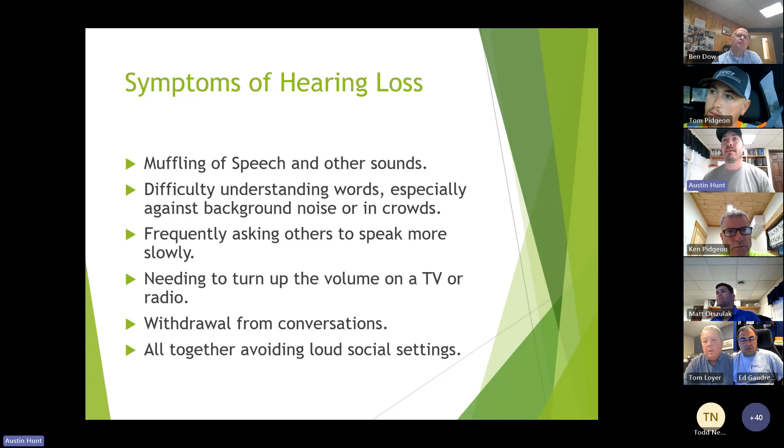So I'm a good example of this. I have some hearing loss in my right ear, and I notice, like in packed restaurants or in crowds and things like that, where I just can't focus on who's talking to me unless they're talking right to my face. So those are things to look out for.

So the permissible noise exposure is 85 decibels for 8 hours. And then as you can see, every 3 decibels it cuts that time in half. So when it goes up to 88, 4 hours. 100 decibels, only 15 minutes. So it goes up exponentially as things get just a bit louder.

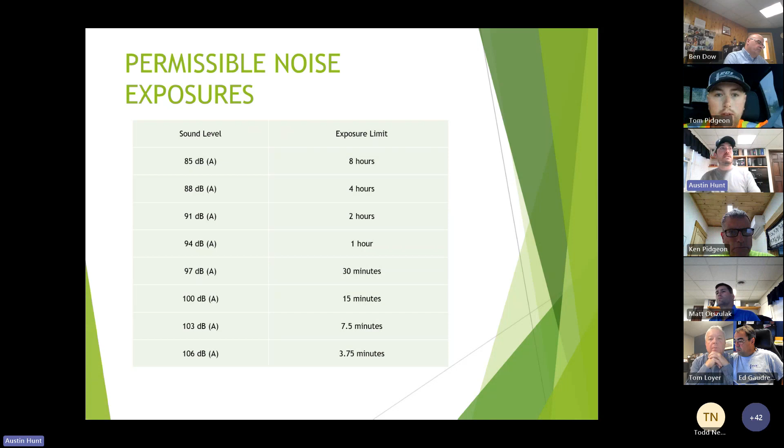You can get an easy little noise monitor app on your phone that will tell you the decibel rating. It's not super precise, but it's good enough to give you a small idea. And we can also come down, we have a decibel monitor. We can monitor what the noise is on the site for over a couple hours or something like that.

So prevention: eliminate or reduce the noise level. Try to surround the source with something that'll muffle the noise. Distance yourself, put some distance between yourself and the noise. If you got a generator running all day, put it behind a job trailer or something like that. Don't have it right in your line of sight where you can hear it all day long.

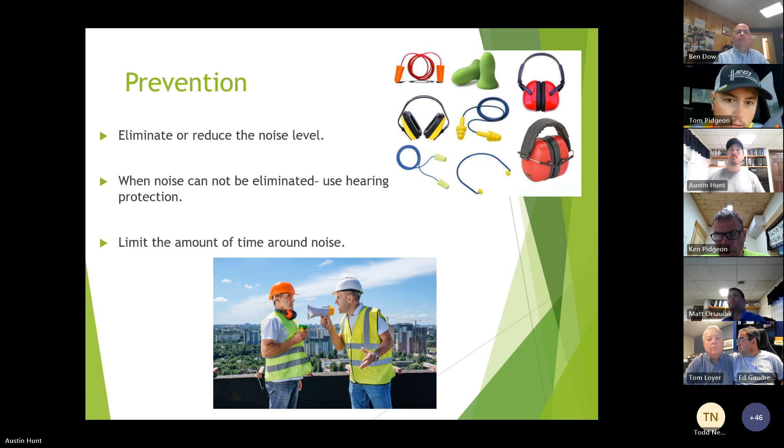For announcements, continuing with this one, there are new vehicle and equipment fuel cards, check with Sarah to exchange them with your old cards. The current ones expire in September, so don't get stuck without a fuel card. The healthcare premium holiday for 2023 is continuing, and we are getting close to the end, so enjoy it.

The next thing I have here is that ECI received a safety recognition at the National Contractors Insurance Conference in August, just last week, at our meeting in Prague, the Czech Republic. And we get a certificate and are recognized by our group.

Since 2019, ECI has been a member of NCI, a contractor type captive insurance company for workers' comp, auto, and general liability. Captives are a co-op type of business insurance, where each member is a shareholder of the insurance company. The top focus of NCI, a 260-member organization, is employee safety. Other local Vermont companies in NCI include FR Lafayette, Omega Electric, and Vermont Mechanical. So we got some pretty good representation from Vermont companies in our group.

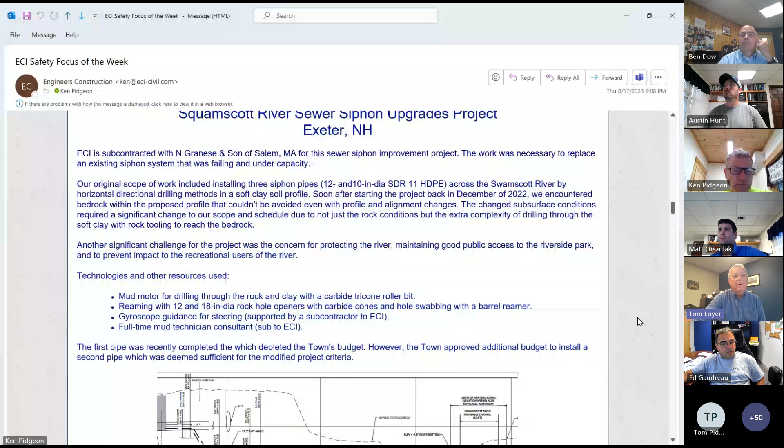This was our first time using a gyroscope. We had a full-time mud technician consultant on-site at the request of the project owner, and he really did a nice job — I think our folks learned even more about mud, so that proved to be positive.

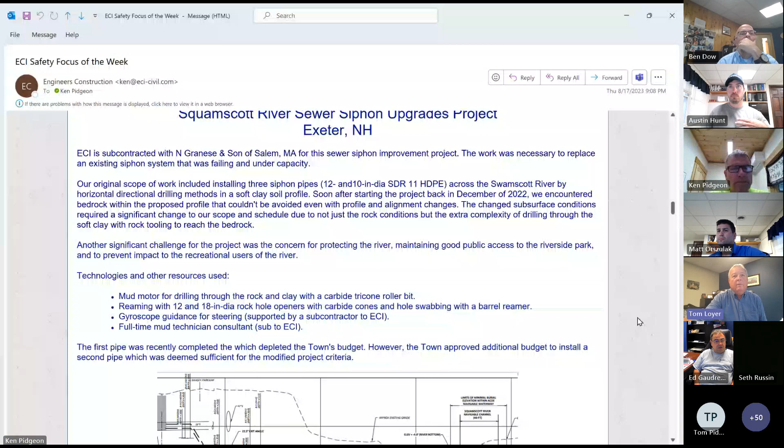The first pipe was completed Tuesday of this week, which depleted the town's budget. The town also, on Tuesday, approved at a special town vote additional budget to install a second pipe, which was deemed sufficient for the modified project criteria — that's barely going to get them by. Initially it was going to be 3 pipes, but switching to two 12-inch pipes is going to get them over the hump and within their budget. So we'll be back in December, after December 1st thereabouts, to begin the next pipe.

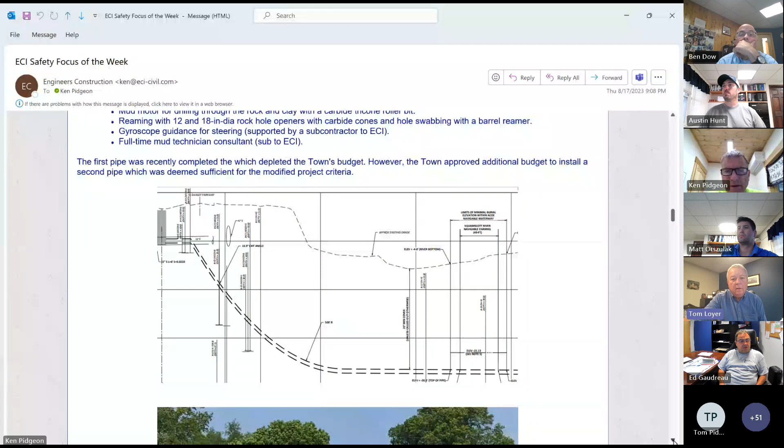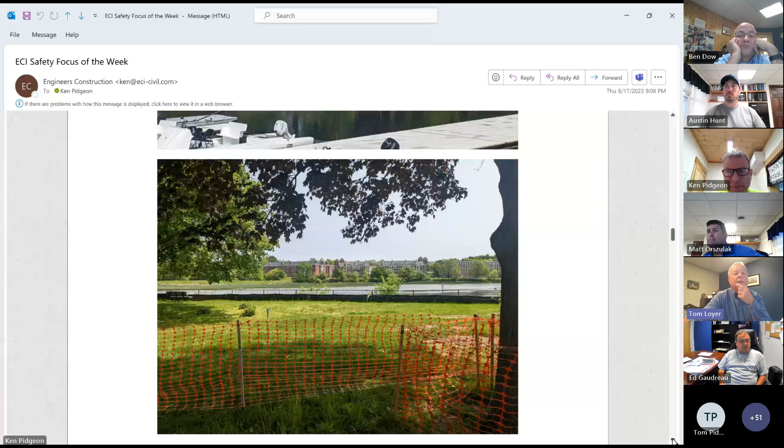We refer to this project as the Swasey side and the mill side. The Swasey side is where the sewer treatment plant was, and that's where we had our reclaimer set up and did our pilot drill across. The next picture shows the mill side, where we ended up. This shot was a little under 900 feet, but looking across it sure looks further. This is the area we drilled to and ultimately pulled from.

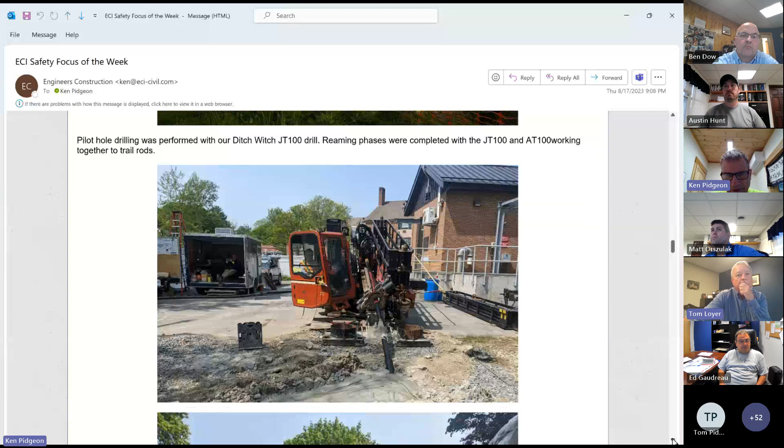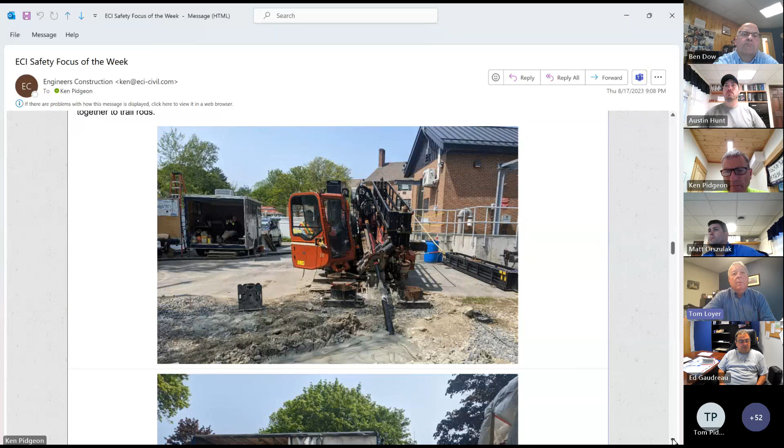We used our JT100 drill for the pilot hole, then used both the JT100 and AT100 working together, trailing rods when we increased the hole size. We were backed right up to the wastewater plant and there was absolutely no room to work. One consideration early on was bringing in the bigger blue drill to help, but the site wouldn't take it. So it's tight, but this shows the sewer treatment plant and our locating trailer.

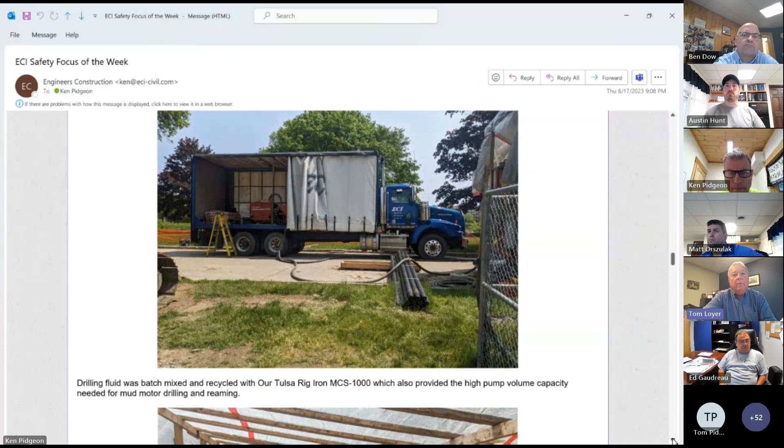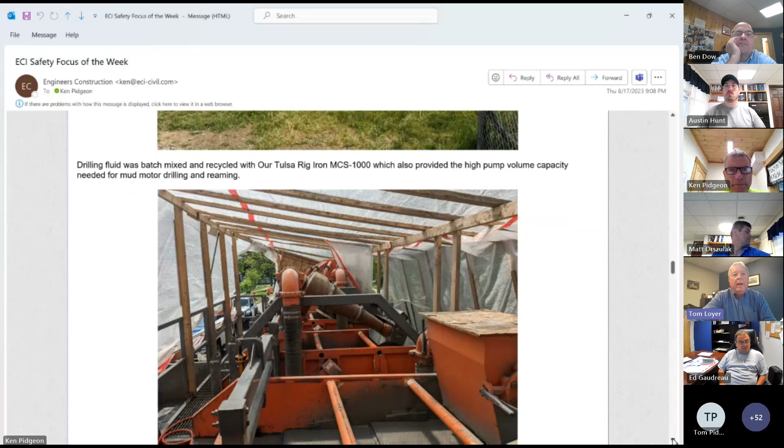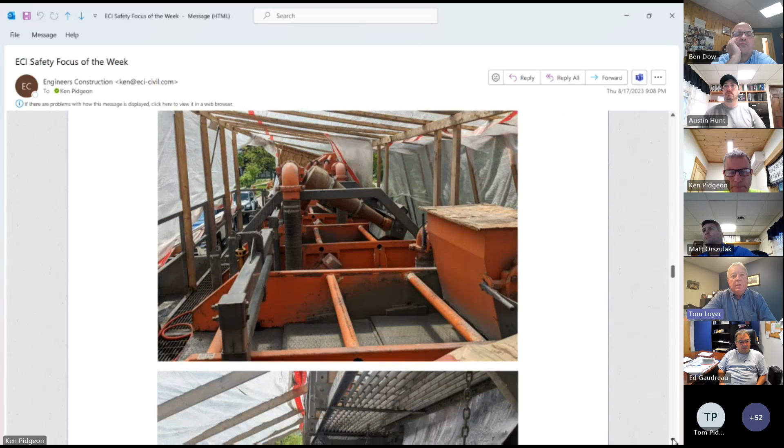There's our mud truck, mixing mud. That machine got a lot of work this time around. Drilling fluid was batched, mixed, and recycled through our Tulsa rig, which also provided high pump capacity for the mud motor, which uses a lot. Here's the reclaimer with the shakers, and the next picture shows the solids coming out - they get less solid as you go. It goes through 3 series of shakers to get rid of all the solids, and then we recycle the mud and continue.

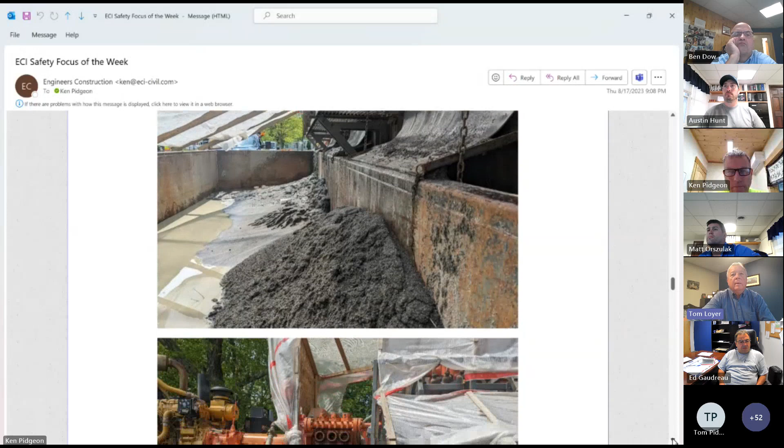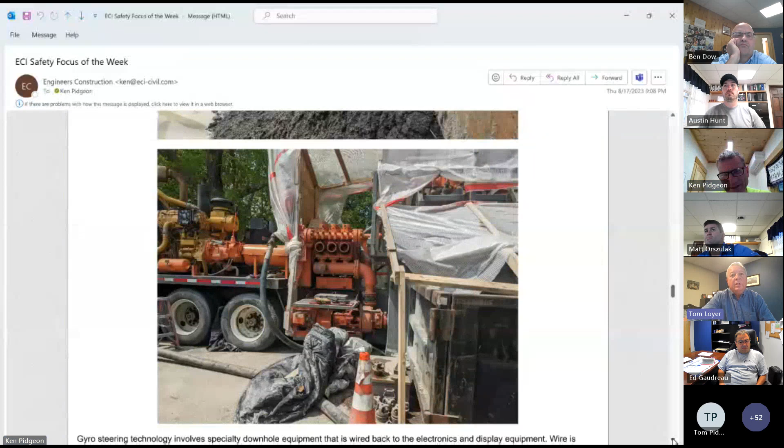There's the pump and the power station. There's 2 very large diesel engines - you can't see both of them. There's one Cat on this face, and another one on the other side. It's a massive machine for sure, definitely heavy, and it pulls hard.

We used gyro technology for steering, as I mentioned earlier. This involves specialty downhole equipment that is wired back to the electronics and display equipment. Wire is added and spliced to each drill rod as the borehole is advanced. The data is used to verify line and grade and provides a digital as-built record.

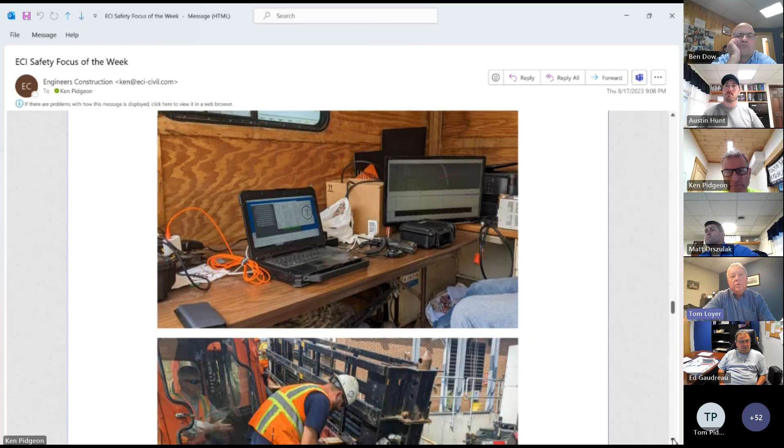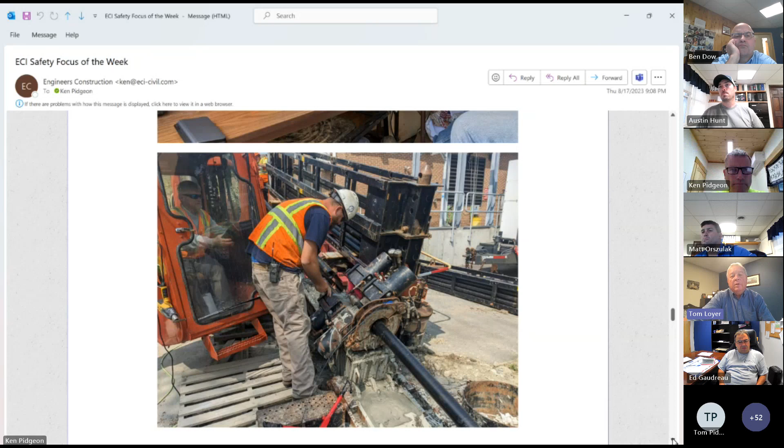Sometimes when we go across water we couldn't locate by land or do a walkover - the soils were so soft on the river's edges that Carter would have sunk out of sight walking on that. We also couldn't get a traditional wire across because the Coast Guard wouldn't allow it. So this drove us to this technology, driven by 3 different softwares, providing a massive amount of data including downhole pressures, which was important for the DES to know we were mitigating fluid release as best we could. It is amazingly accurate.

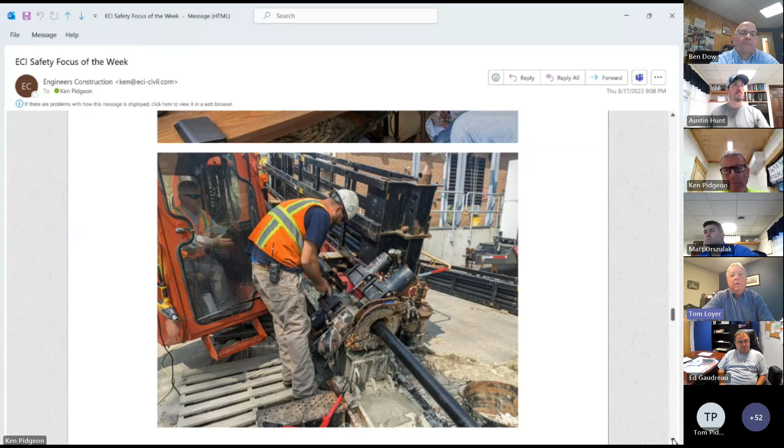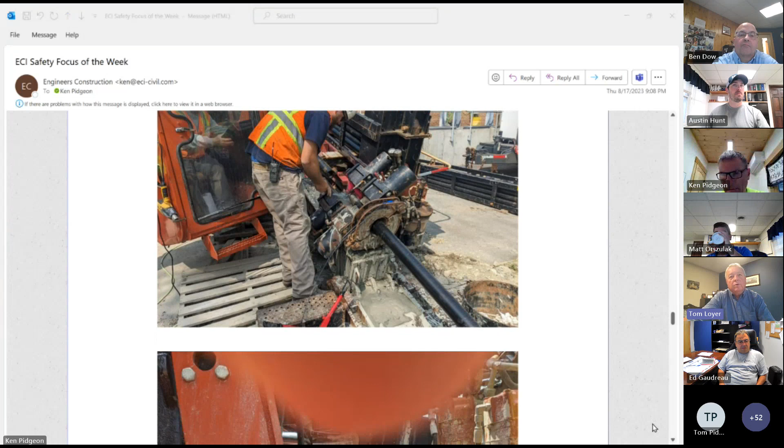This is Greg here splicing together at every joint - you see the joints in the middle. He's splicing together the wire that goes through the drill steel. When we make that connection, we also put shrink tubing on top to avoid any conductivity within the rods.

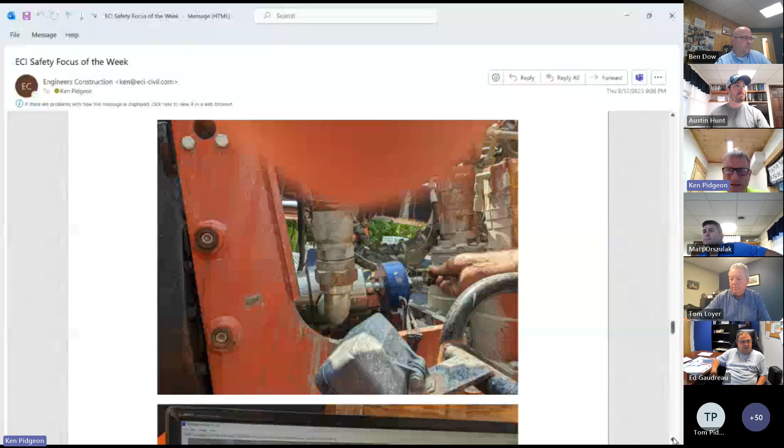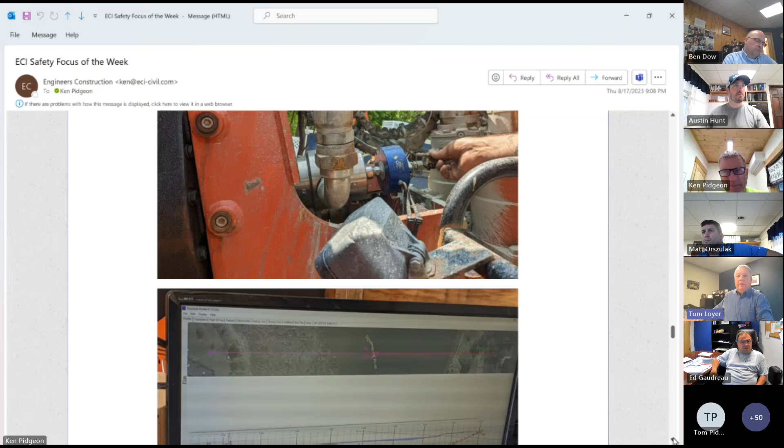This is the back end, where we're feeding the wire down through the drill steel, on the tail end of the drill. The drill steel is rotating, obviously, and the wire is inside, which allows that wire conductivity to continue through that rotation without twisting the wire off. That's the reason we chose to use the AT100 - which probably most times would be our preferred drill - it's got a drill steel inside of the steel, so it doesn't allow for the wire. So it pushed us to the JT.

Here's the profile. The gyro technology allowed us to put together a profile and an as-built - degree of inclination going in and exiting, and depth at bottom of river. This data was important for permitting purposes, but it was also great to have in advance because we were watching the screen and seeing how we were progressing along the way. A lot of fine steering adjustments were allowed, and they held a really good line, both vertically and horizontally.

This is Mike Williams, our mud technician. He came out of Houston for us, and he was an absolute gentleman - great to work with, and did a super job with ECI, with our client and Grenice, and certainly with the town and with Wright Pierce. We provided daily logs every day - bore logs, his mud measuring, and also all of our pressure gauges on both drills.

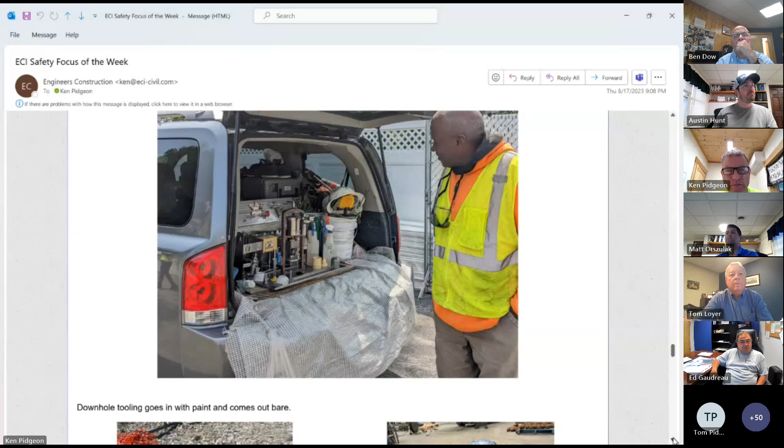A lot of monitoring here. This picture on the left and the bottom, this is the actual pilot coming out. That was the first stage of success.

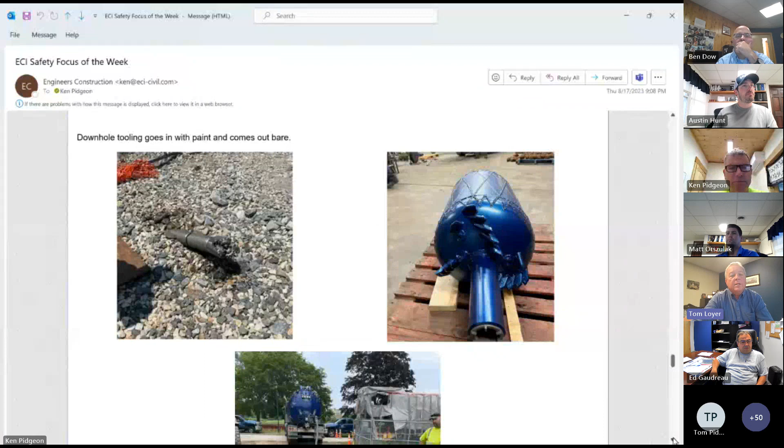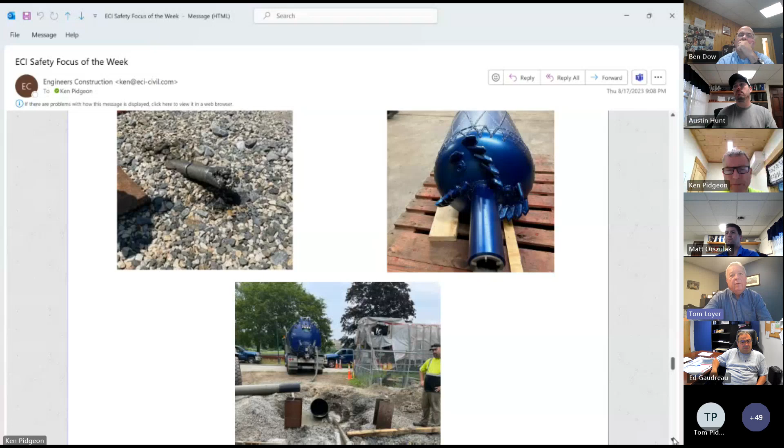Then after that, we went to the 12 and 18-inch ream, and on the right-hand side you see the barrel reamer. So we drilled an 18-inch rock hole. That section of gravel kept collapsing, so we brought this barrel reamer in to recompact that gravel and make a path for the pipe to follow. This barrel reamer is 14 inches in diameter.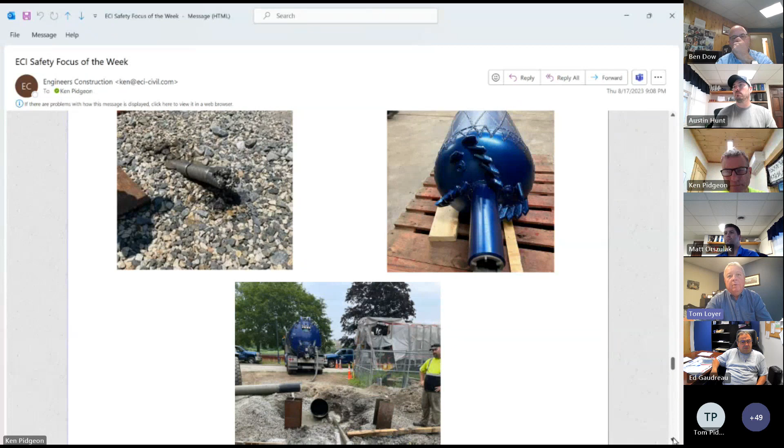There's a story in itself here. So when we tried to pull in the first time, we ran into that gravel layer and it got compacted. This steel casing you're seeing here is a 24-inch steel casing. We drove it down to the rock as a conductor barrel, hoping to push back out. You see the reamer's broken off here. So this is the first one.

The second one we were able to pull out. So where we had a break off, we wanted to push through the steel casing. That's a 24-inch casing and an 18-inch reamer, and the soft clays dropped it below the casing. This was a bit of a risky effort - everybody knew it may or may not work, but it was our next best step.

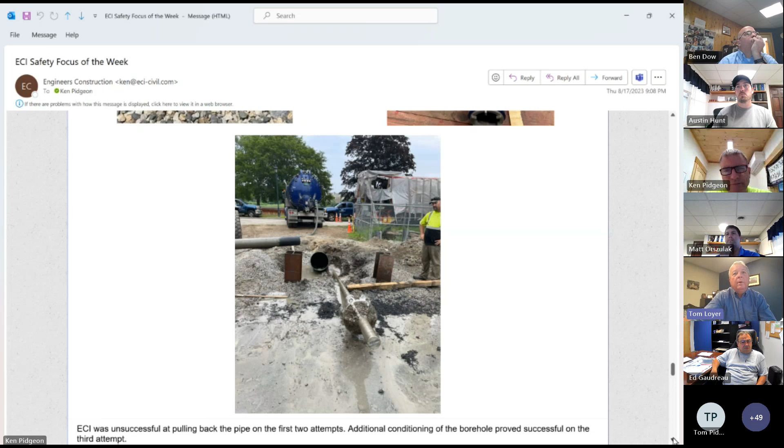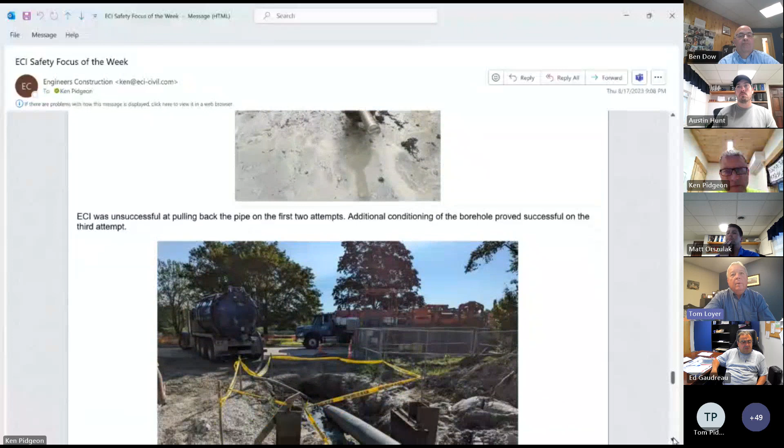And this next picture is the pipe going in. This will be on the mill side. No, this is our first attempt - we ultimately brought this pipe to the mill side. This was the pull we tried from the Swayze side where we got stuck, but we were able to back out.

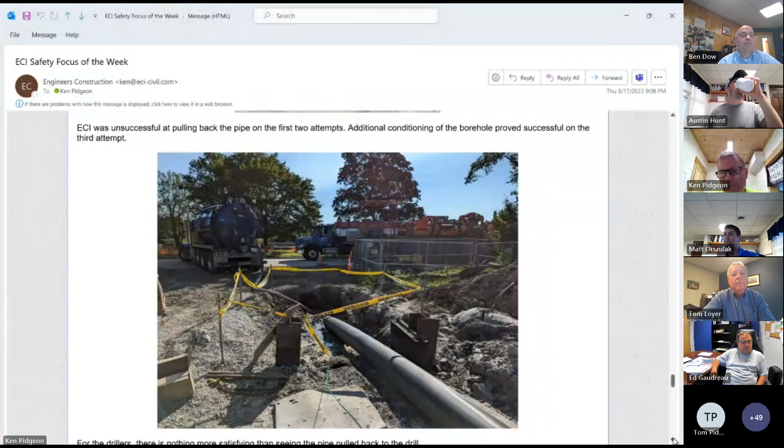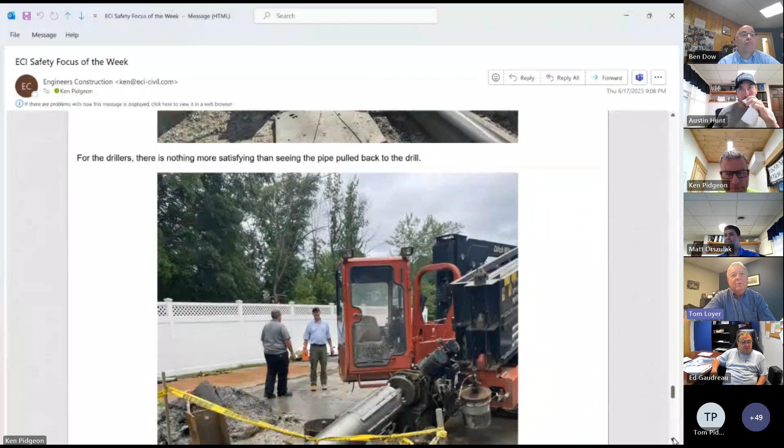For the drillers, there's nothing more satisfying than seeing the pipe pulled back to the drill. So everybody was pretty pleased at this point. This gentleman here to the right is the city engineer, Paul. He was an advocate and an ally throughout - a very calming force.

This is the public works director here. As much as those guys may be smiling, our crew certainly was, and all the ECI people who worked on this - kudos, just an unbelievable effort to get to this point.

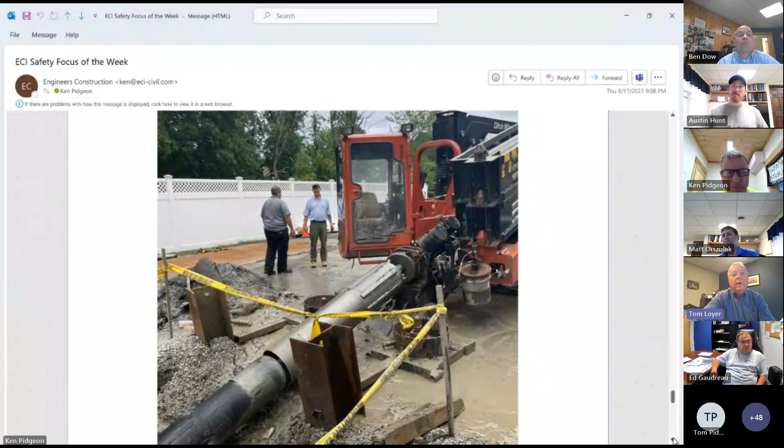This right here shows the barrel reamer right close to the drill. We fabricated a piece of steel to protect our swivel that goes between the barrel reamer and the casing, and the HDPE pipe followed. At the end of that day, that pipe was pressure tested and in good shape, so that will be connected.

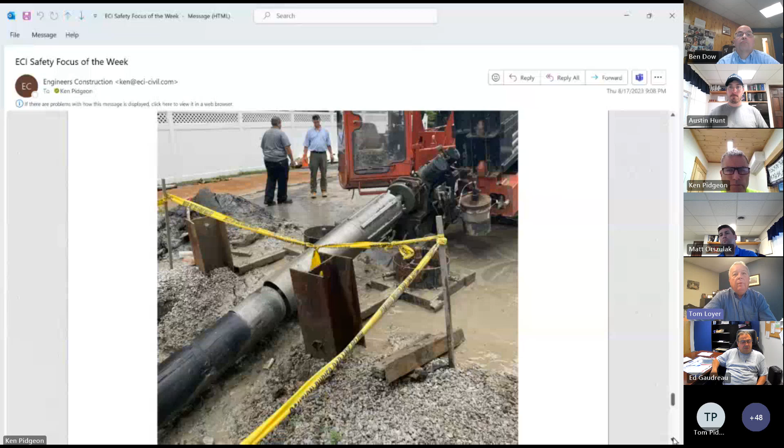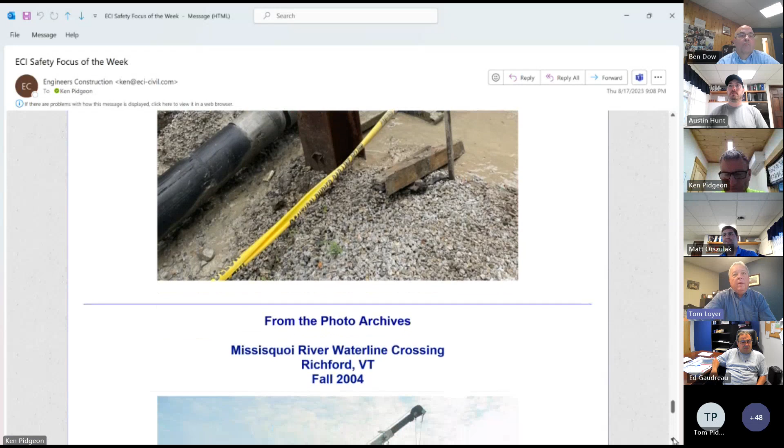Okay, and then we're off to the next one sometime around December. We've got a commitment of December 1st, contingent upon availability of our steering contractor, but thereabouts.

Good, okay, I consulted - well, good job. Yeah, so Mike Wright had a lot to do with this whole project, huge, but that December 1st date, that was the parameter he set. It was basically anything after deer season. Oh okay, we all know Mike loves his deer hunting, so.

Well, great job, and an interesting project for sure. Some good technology we applied to this. Absolutely, for the photo archives, and thanks Tom for presenting.

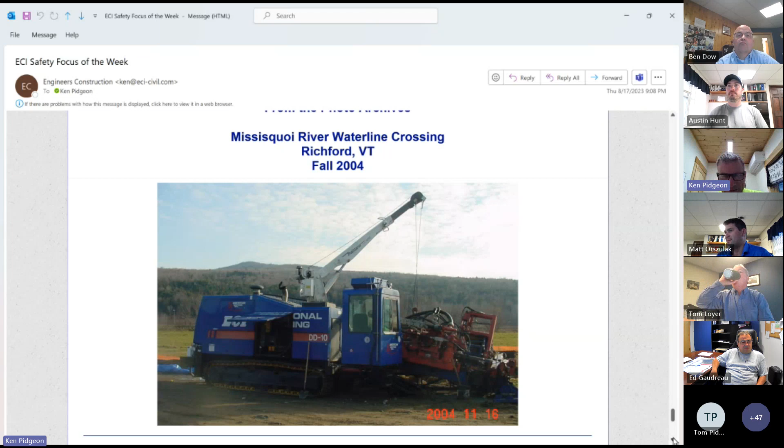Yep, for the photo archives, we have a photo from 2004, the Missisquoi River waterline crossing we did up in Richford, Vermont. So it brings us back to almost 20 years.